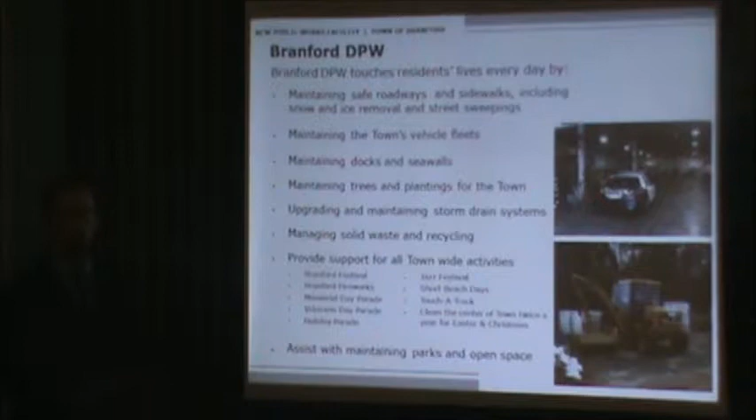One of the first things we do in this process, from our experience with my firm - we've been involved in more than 60 public works facilities in New England over the last 15 years - is identify what the department does for the community, because they play a very vital role. I thought it important to recap that for you and others in the audience today, to touch on what this facility will serve.

The DPW touches the residents' lives every day by maintaining safe roadways and sidewalks, including snow and ice removal, maintaining the town's vehicle fleets, maintaining trees and plantings for the town, managing solid waste, and providing support for town-wide activities. They also assist with parks and open space upkeep within the community.

In addition to the Department of Public Works, the Board of Education and General Government Buildings will also be supported out of this facility, and they provide a vital role to the community as well by maintaining town-owned buildings and Board of Education facilities through carpentry services, HVAC, electrical, and plumbing maintenance activities. So quite a bit goes on within this facility.

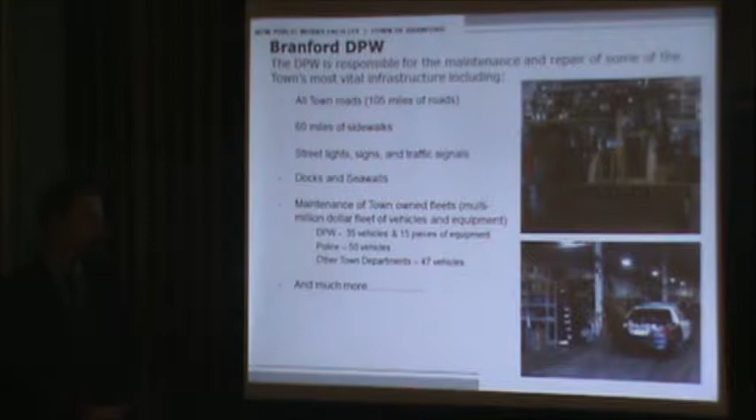The DPW is responsible for the maintenance and repair of some of the most vital infrastructure of the town, including 105 miles of roadways, 60 miles of sidewalks, street lights, signs, docks, and seawalls. They maintain all of the town's fleets, which include 50 pieces of equipment, vehicles and equipment from DPW, 50 from the police, as well as 47 other town departments, and much more that they're responsible for on a day-to-day basis.

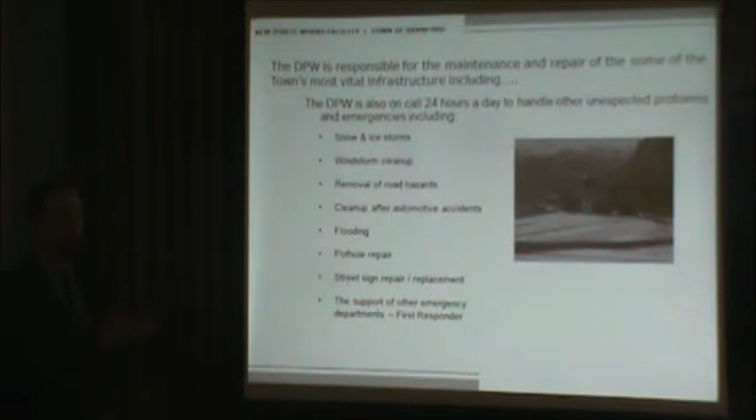It's important to note they're also on call 24 hours a day to respond to the needs of the community, for things including the obvious snow and ice storms, windstorm cleanup - which we're all very familiar with this past year with all the windstorms - dealing with flooding, and support of other emergency departments.

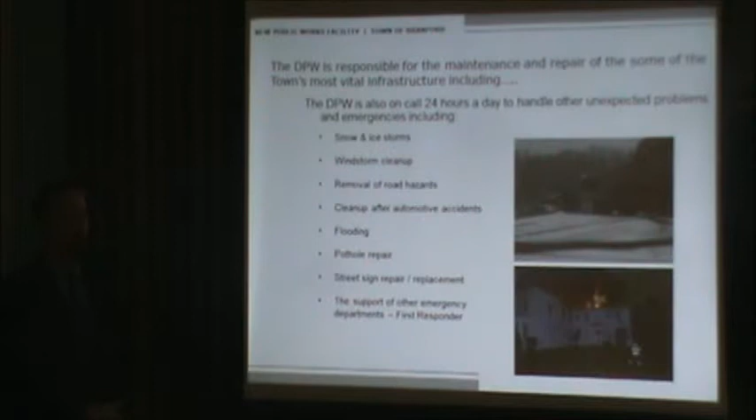A lot of people ask, well, why are we talking about a house that's on fire? Public Works will be responding to block off roadways, clean up after the mess, or clear the road so that other emergency services can get to the emergency needs of the community. So they do provide really a first responder need to the community.

I think APWA recently said it best in one of their articles, where they indicated that Public Works is really the first responders who are there until the emergency is over. So the facility really needs to be designed to support that operation, keeping in mind the first responder needs of the Department of Public Works.

So why does the town need a facility? That was the next step, and what we really wanted to do was identify what the issues are that are affecting their day-to-day operations and their ability to serve the community with the most efficient services capable.

The department's responsibilities have increased significantly over the years, along with the number of vehicles and pieces of equipment, but the facilities have not kept pace. Back in 2007, the report from Silver/Petrucelli confirmed that the existing facility, prior to demolition, was not adequate to serve their needs because of the increase in services the Department of Public Works was providing.

They're currently in temporary rented facilities. This facility was not designed with Public Works and emergency response operations in mind, and we looked at some of the issues associated with that site. It serves their current needs in the short term, but in the long term it really does not have some of the basic elements needed to provide safe and efficient services.

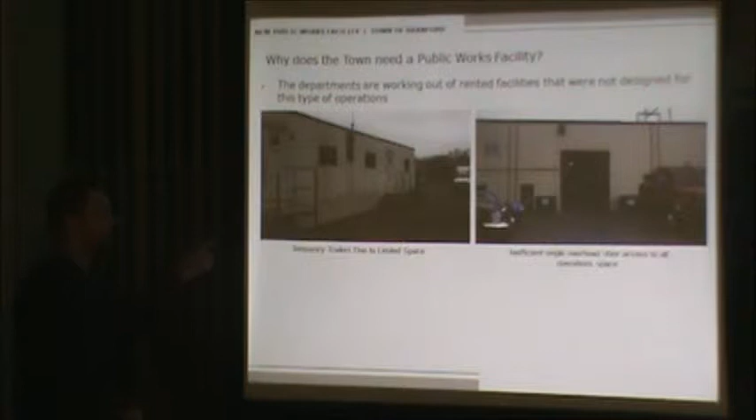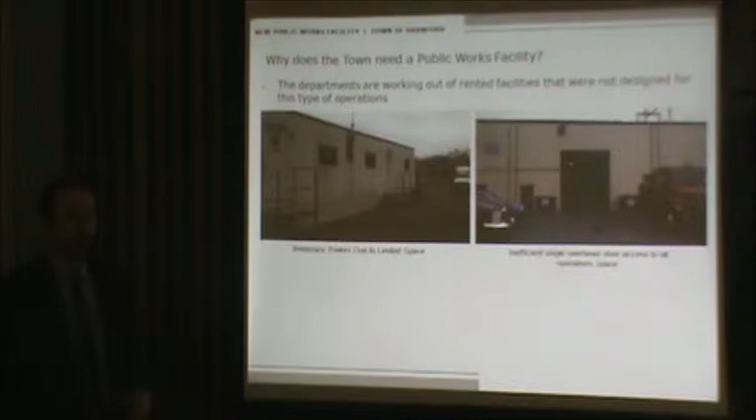The department is working out of rented facilities, including a temporary trailer, due to limited space within the existing facility. In addition, as shown in the photograph on your right, the main floor area, which serves vehicle and equipment storage, maintenance, workshops, and employee facilities, is all accessed through one overhead door. This becomes a bottleneck that impacts operations, and the facility itself is not adequately sized to service the entire fleet.

As a result, you have a lot of equipment that ends up being stored outdoors, whether it be a plow and all of their attachments. And this is some very expensive equipment. The replacement of one large DPW vehicle could be $150,000 to $180,000.

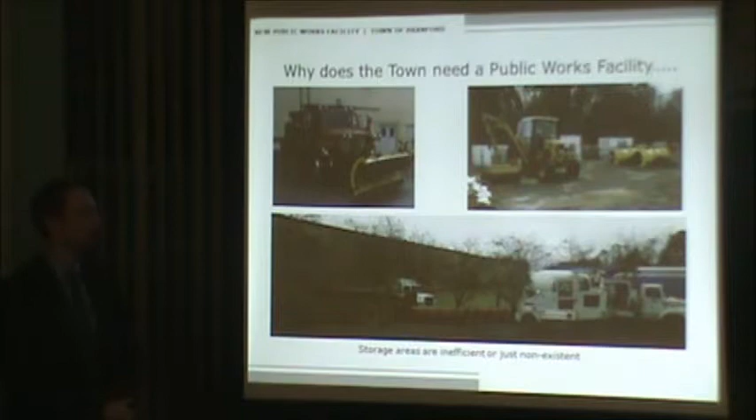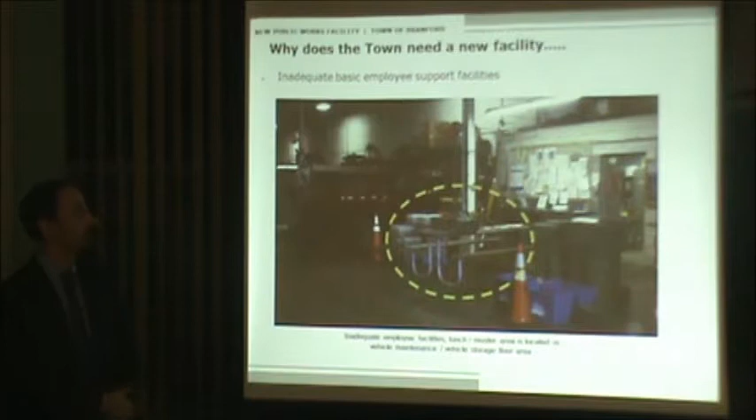One of the biggest questions we get when designing these facilities is, do we really need to put the trucks inside versus storing them outside? That's an important question we've done a lot of research into, and we've broken it down into 6 main points. I'm going to show you some examples of photographs from other communities we've documented.

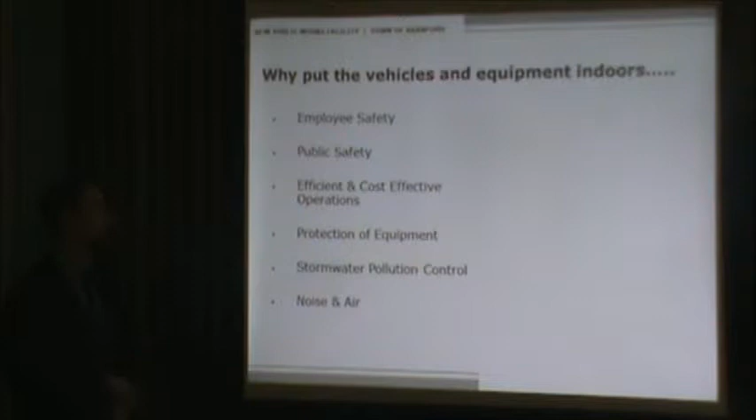The first is employee safety. If the equipment is stored outside and you have to clean it up, this is what employees have to do: stand on the running board, stand on a tire, and reach over. It's really difficult to maintain that equipment, especially if it's raining, sleeting, or snowing.

Public safety is another important issue. If a vehicle is stored outside and you can't get it started or you have to clean it, it can delay the response times of DPW, which could result in unsafe road conditions.

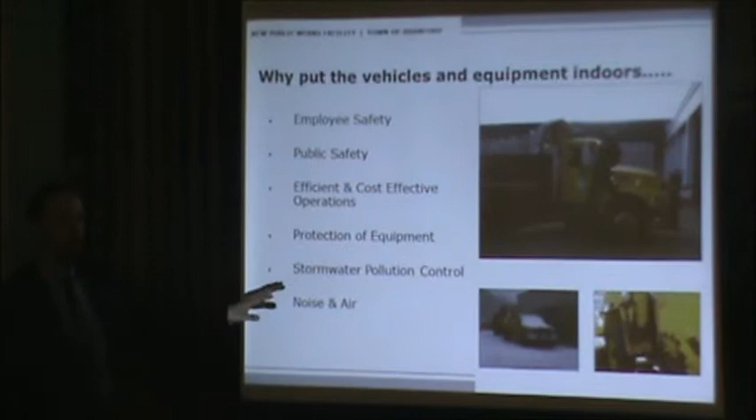Finally, stormwater pollution control, noise, and air are very important. When vehicles are stored indoors, any drips from those vehicles go into a floor drain system and ultimately to a sewer system, as opposed to going into the stormwater system when stored outdoors. Noise and air are an issue too, because when equipment is stored outdoors, it takes quite a bit of idling time to get the vehicle up to operating temperature.

I think the best way to show that is with 2 quick video clips. This is a video clip of a vehicle, standing at the back looking up towards the exhaust stack. This was stored in a minimally heated garage at 45 degrees, and when we started it up with the operator, this is what we got.

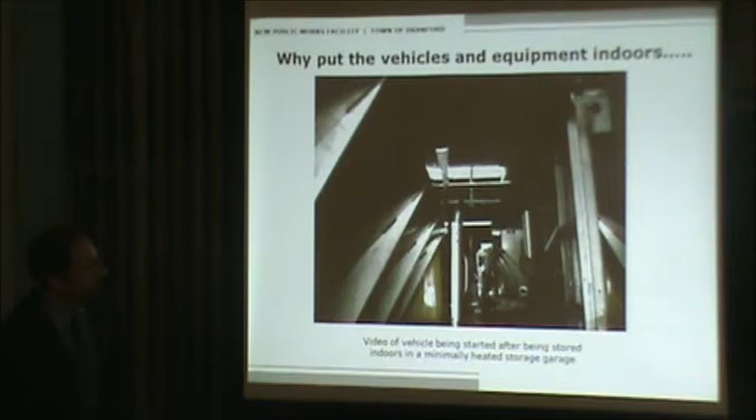You can see it started up right away. There was just a quick puff of exhaust, and the vehicle was ready to go in about 2 minutes once the air brakes came up to pressure.

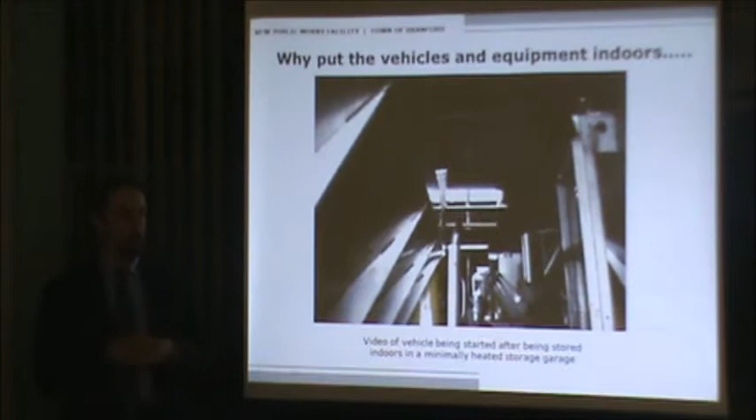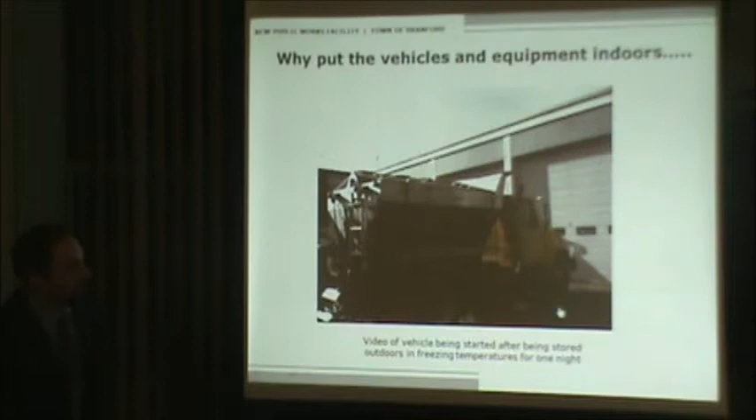We took that same vehicle, left it out overnight in 20-degree temperatures, came in the next morning, and started the vehicle. This is what we got the second time. As you can see, because the vehicle is cold, the diesel fuel gels, you get incomplete combustion, and you get quite a bit of exhaust. It actually took us half an hour to get this vehicle started.

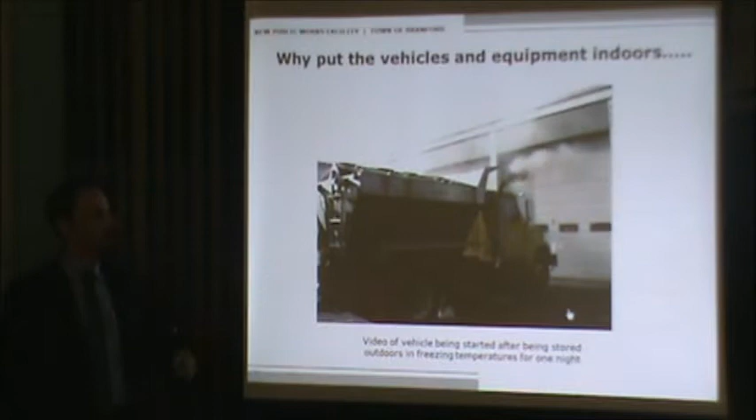So you can see, in an emergency response situation when they're trying to get out and repair the roads, or ice or salt the roads, you're going to have trouble getting some of these vehicles started, never mind the noise and exhaust associated with storing this equipment outdoors.

The next step for us was to go through and identify what is proposed to meet the current and future needs of the Public Works, Board of Education, and general government buildings. That process involved, based on our experience, meeting with the staff, because every community does it a little bit different.

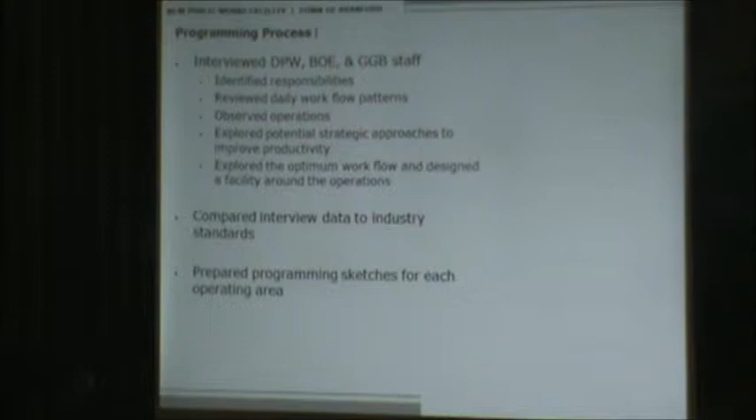So we interviewed the staff, reviewed their daily responsibilities and workflow patterns, explored potential strategic approaches to improving productivity, and compared the data we obtained to industry standards. Then we began preparing programming sketches, which were a tool for us to take what we heard, put it on paper, and review it with each individual to make sure we understood their operation.

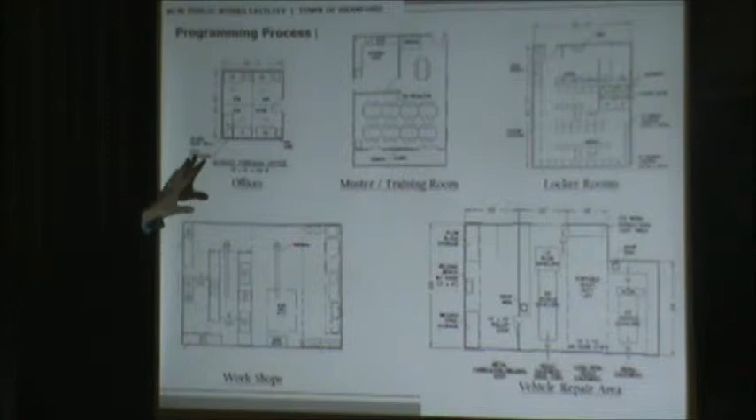This is a sample of some of those programming sketches, ranging from office to muster and training rooms, to locker rooms, up to larger workshop areas and vehicle repair areas. This was a result of those interviews, and it allowed us to sit down and further refine the program.

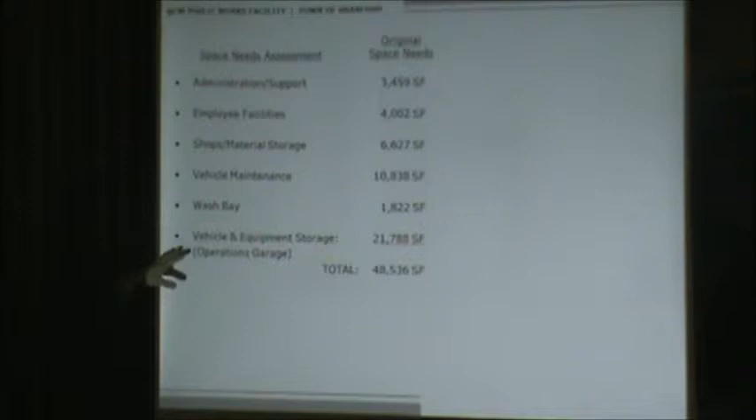When we completed our space needs assessment, we broke it into the major operating areas: administration, employee facilities, shops, maintenance, wash, and vehicle and equipment storage. We identified a need of roughly 48,500 square feet.

That seemed a little on the high side for us initially, primarily driven by the fact that we had 3 departments operating under one facility. So we reapproached our programming analysis, worked with DPW, and came up with ways to consolidate a lot of those spaces and have shared use of many of them.

As a result of that, we were able to reduce the space needs from 48,500 to roughly 35,900 square feet, which is a 26% reduction.

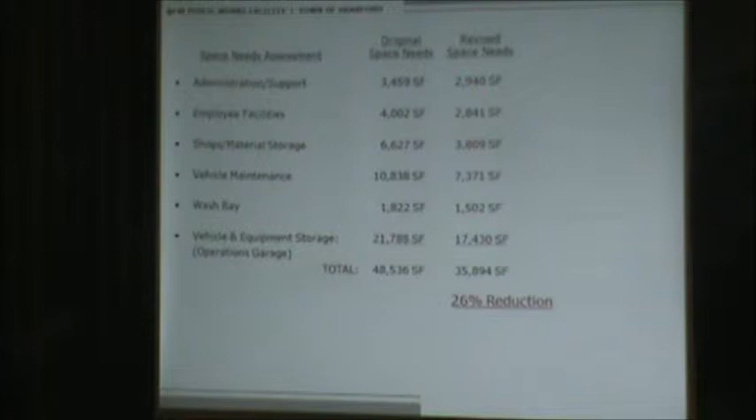The next step was to compare that to industry standards, which we developed from all 60 facilities I mentioned. This basically calculates a range of where the facility should fall, and that identified a need of roughly 35,000 to 42,000 square feet.

So as you can see, with the revised space needs assessment, we're at the lower end, but within what other communities are doing. That was good verification that the program in front of us was adequate. It's important to note that once you head below that minimum recommended space needs, you begin to have compromises in operations. Not that you can't compromise, but the way it's designed and programmed now will meet the current and future needs of both DPW, Board of Education, and GGB.

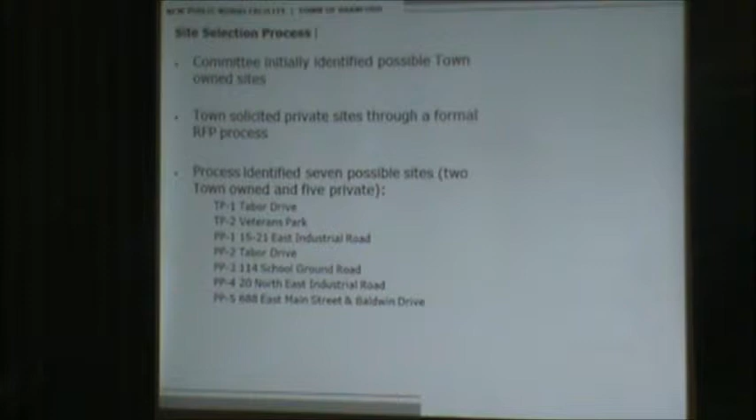Concurrently with the program analysis, we began the site selection process. As discussed earlier, we initially worked with the committee on the possible town-owned sites and also the privately owned sites that came up through the RFP process.

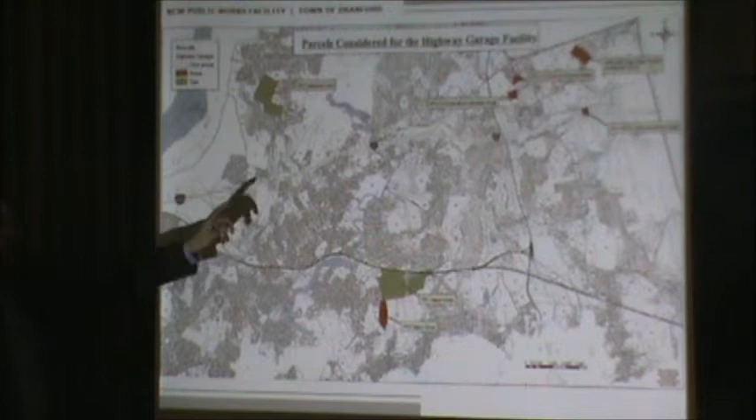This is a list of the 7 sites identified by the committee, which we took to the next step of evaluating. This plan shows a general overview of where those sites are located within the town. The privately owned sites are shown in red, in the upper right as well as the bottom, and the publicly owned sites are shown in green.

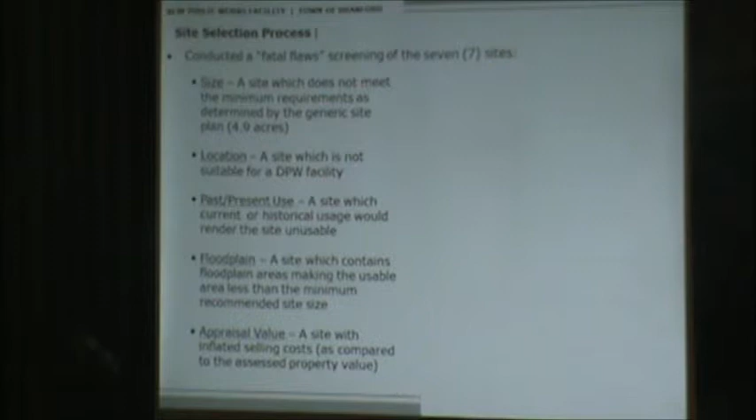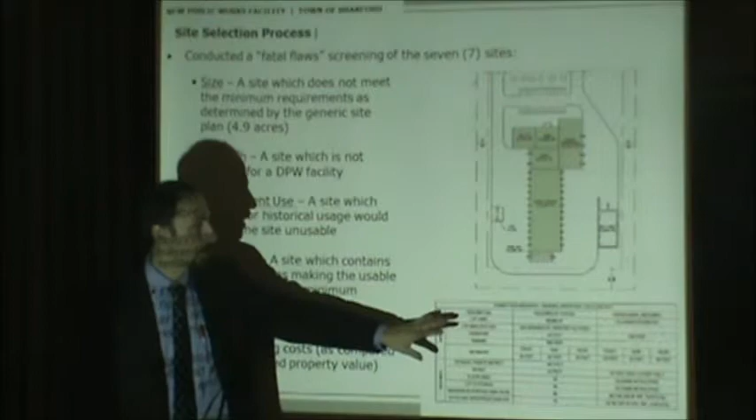The next step for us was to take those 7 sites and conduct a fatal flaws analysis, which looked at items such as the size of the site. We took the program that was prepared and made a generic site plan, which, using both the operational requirements and the zoning requirements, identified a need of roughly 4.9 acres to support the operational aspects of the facility as well as meet the zoning. That became our baseline for the site size.

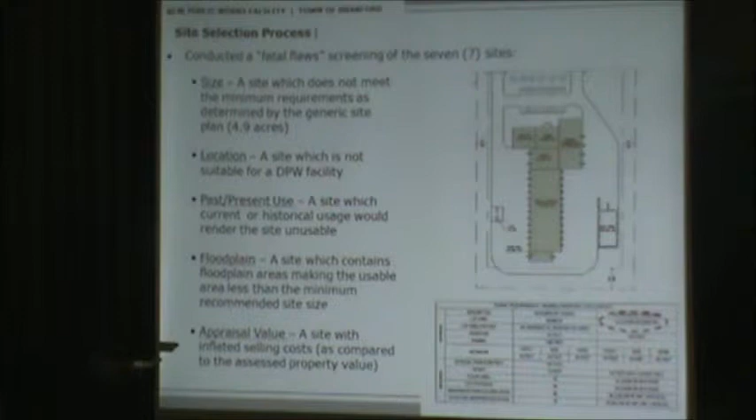We looked at the location to determine if it was suitable for a DPW facility. We looked at the past and present use, the floodplain, which can restrict development of these sites, as well as the appraised value, just to check on the privately owned sites to see if the price being offered was reasonable.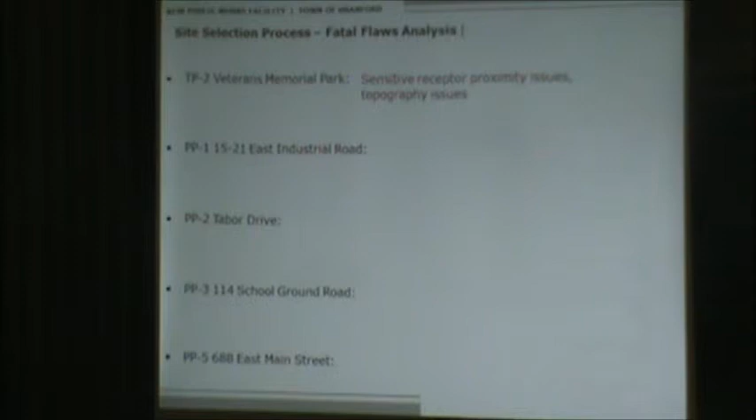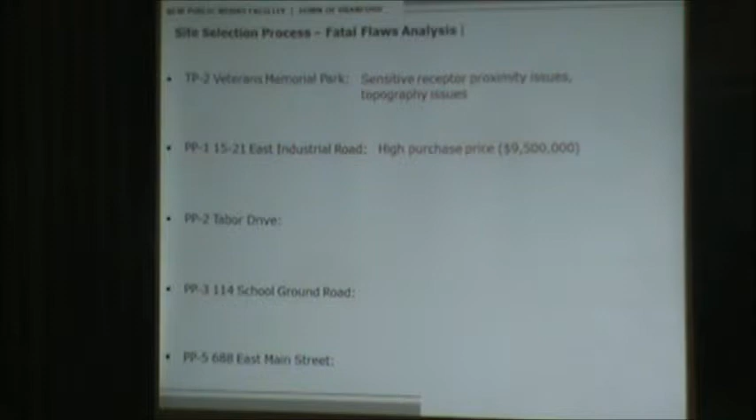Through that process, we eliminated 5 of the sites, first being the Veterans Memorial Park, primarily due to sensitive receptor proximity issues with the abutters, as well as some topography issues in the back of the site. East Industrial Road was eliminated primarily due to the high price at $9.5 million, on top of which substantial renovations would be required to retrofit it for public works operations. The privately owned Tabor Drive site was eliminated primarily because the usable area became too small after we accounted for the landfill area and the floodplain areas that existed on that site.

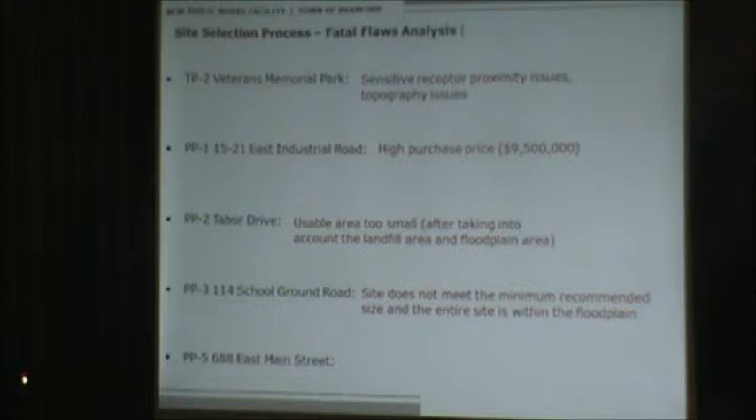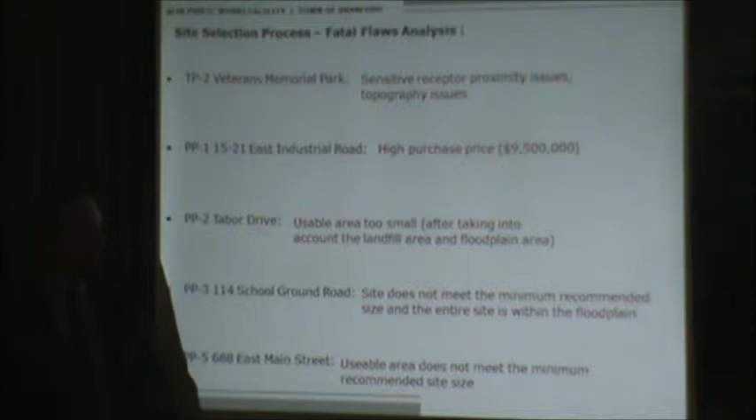The School Ground Road site did not meet the minimum recommended size of 4.9 acres, and the entire site was within the floodplain. And finally, the East Main Street site - the usable area there does not meet the minimum recommended site size, taking into consideration the drainage systems that exist on the site. So those 5 were ultimately removed from further consideration.

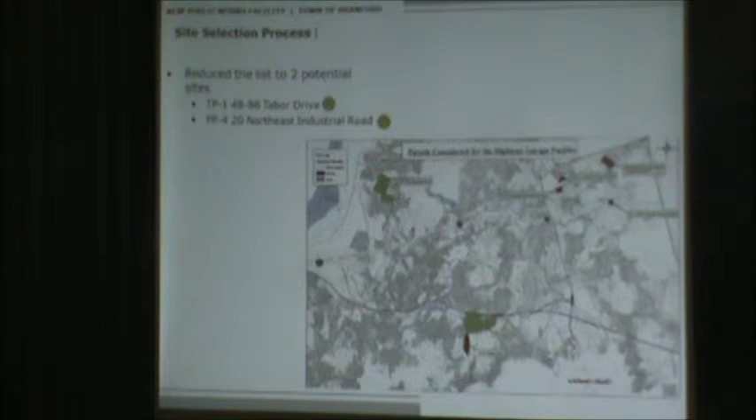So the next step was to take the remaining 2 sites, the Tabor Drive site, the town-owned Tabor Drive site, and the Northeast Industrial Road site, and begin the evaluation in a more detailed manner. This involved looking closely at some of the development opportunities that existed. We developed a 12-point evaluation criteria, ranging from property ownership, to physical site features, to operational impacts, down to zoning consistency.

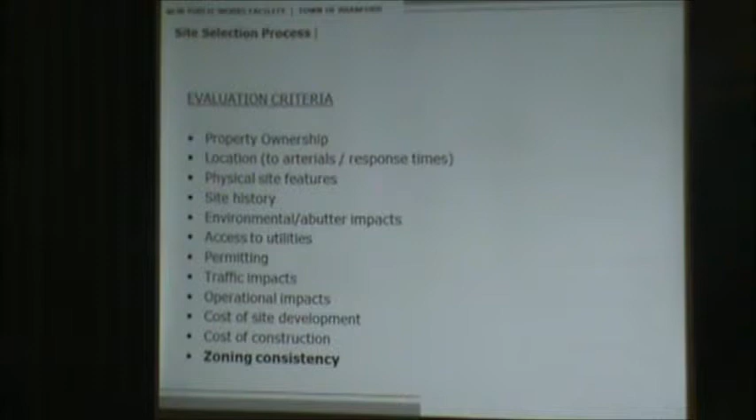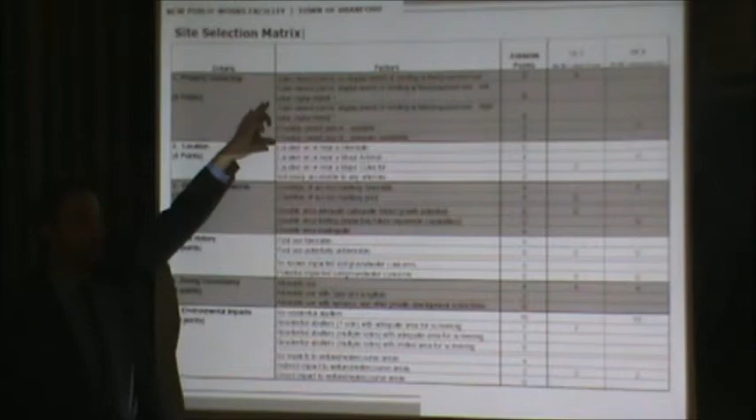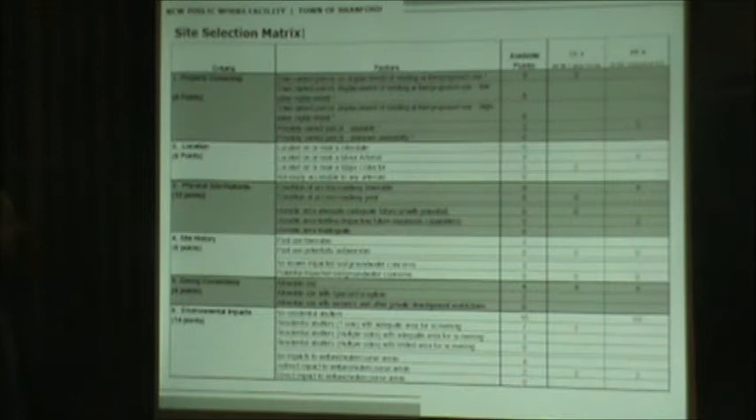These were put into a site selection matrix, and this is a copy of the matrix that's included in your report. For each item, we had an evaluation factor, and then a weighted value associated with that factor. Using all the data gathered, we assigned numbers to each of the items - this is the first 6 criteria, and this is the second 6 criteria. Subsequent to completing this, we subtotaled it.

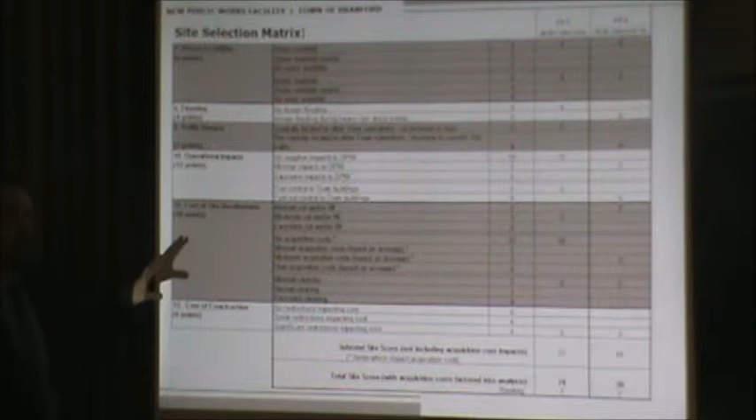Through that process, the Tabor Drive site scored higher than the Northeast Industrial Road site, 74 versus 50. This is intended to indicate which site would serve the DPW, Board of Education, and general government buildings in the most efficient, cost-effective manner.

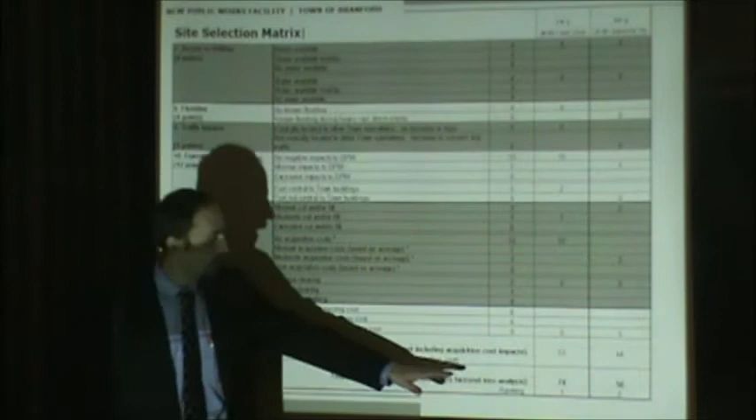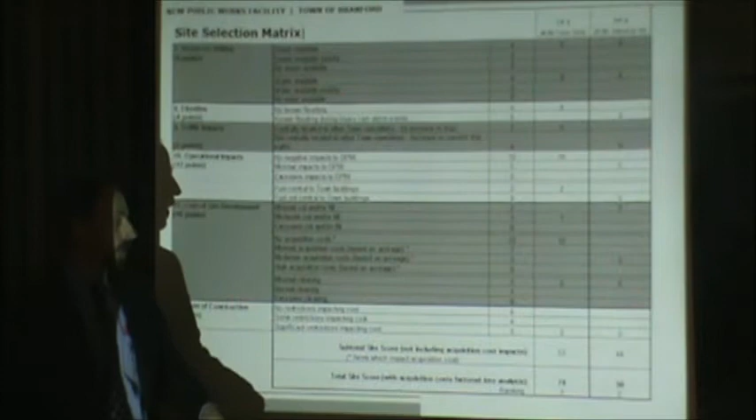One of the items we typically do is back out these scores and look just operationally. So we took out all acquisition cost related criteria and wanted to see how the sites compared just from an operational perspective - can it support the facility, can it support future expansion, does it support circulation. Through that, the Tabor Drive site is at 53, Northeast Industrial Road at 44. So you can see the gap between the 2 sites began to close when you took out the acquisition cost. But in either case, the Tabor Drive site indicated through this process that it was the most preferable site to support the operations.

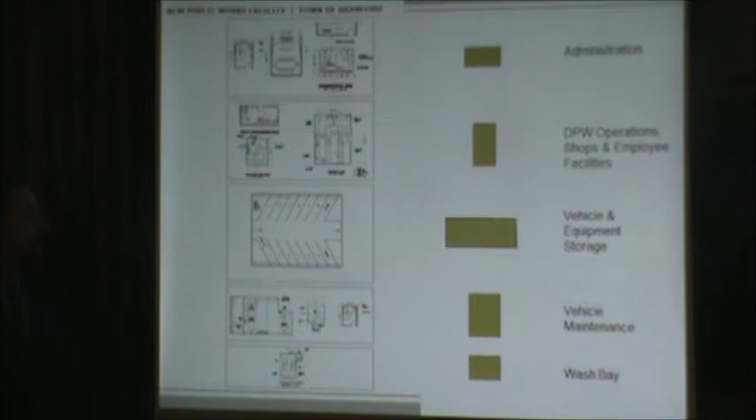Through that process, we then went to developing conceptual building and site alternatives for the concepts. We took each of those room data sketches and pieced them together into our major operating areas. We used these building blocks to then assess the potential alternatives on the site.

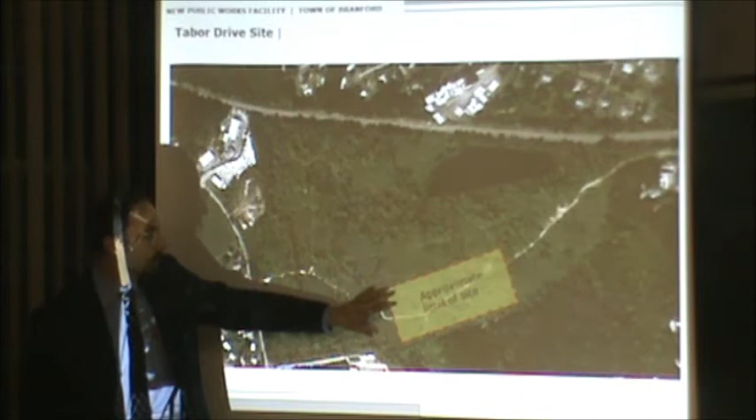This is an aerial view of the Tabor site, and based on a total of 77 acres, we were looking to locate the Department of Public Works facility to the southern portion of the site near the property line, so that the other portions of the site could be usable for other town uses, whether it be fields, passive recreation, or whatever may be the case.

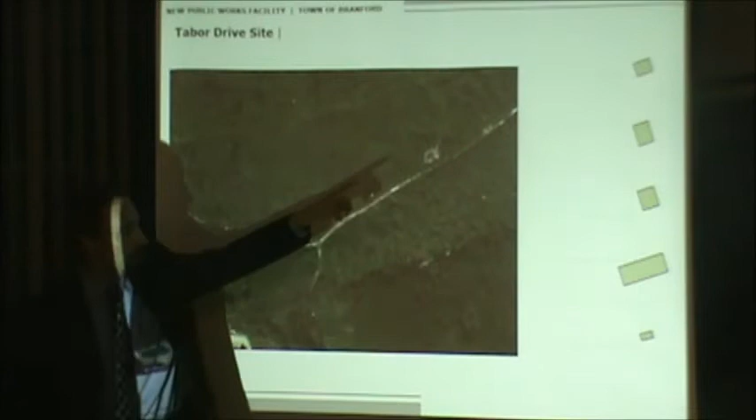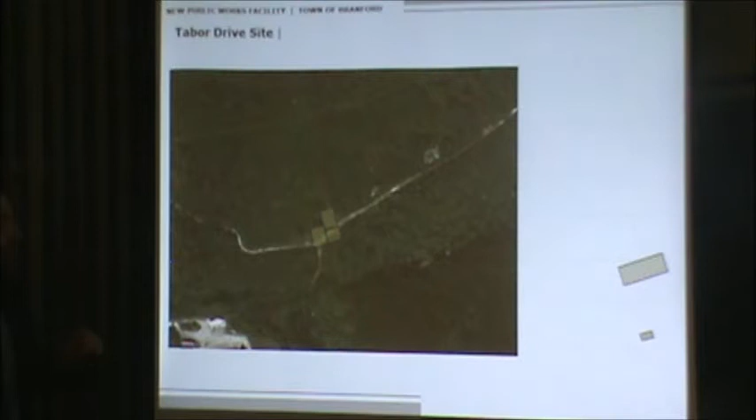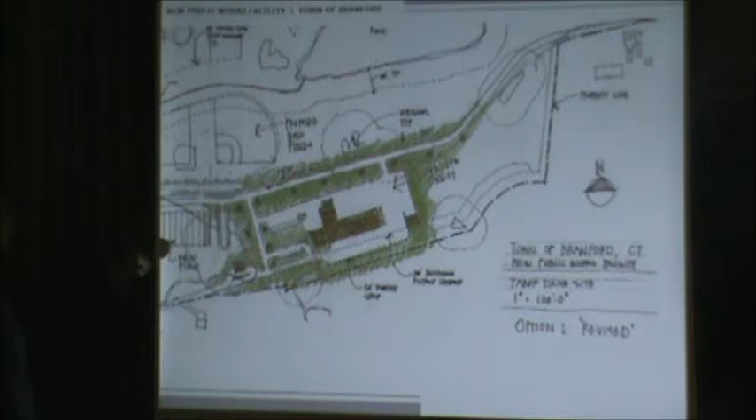So using this general area for the Department of Public Works facility, we created a site plan and began piecing together each of those building blocks I mentioned - the administration, workshops, and maintenance. We pieced them together on the site through a series of alternatives, looking at several different configurations, and ended up with a configuration that had more of a linear fashion. The purpose was so that we could consolidate that site into a linear fashion and reduce expansion to the rest of the site, making more of the site available for things such as ball fields or other passive recreation uses.

What I want to do is briefly touch on the components of the building itself, and show you some photographs of other recently completed facilities so you understand what's going to go into each component. The first being the vehicle and equipment storage that we talked about earlier.

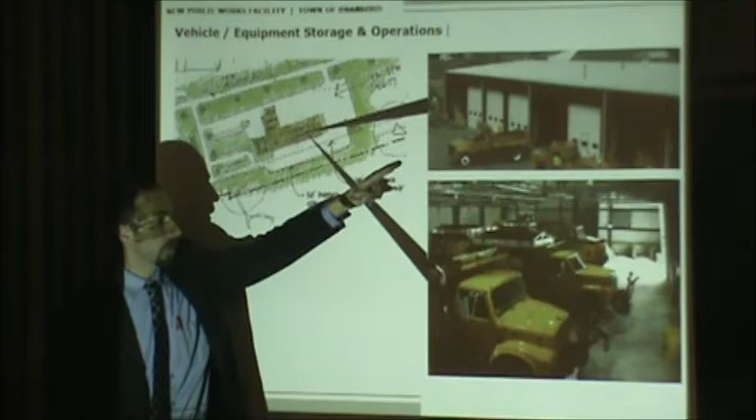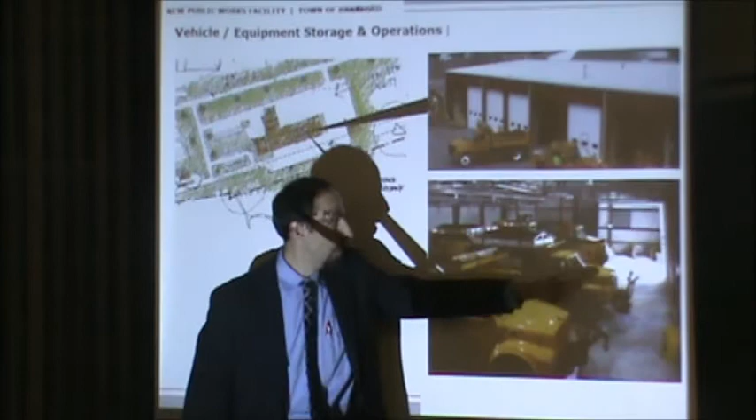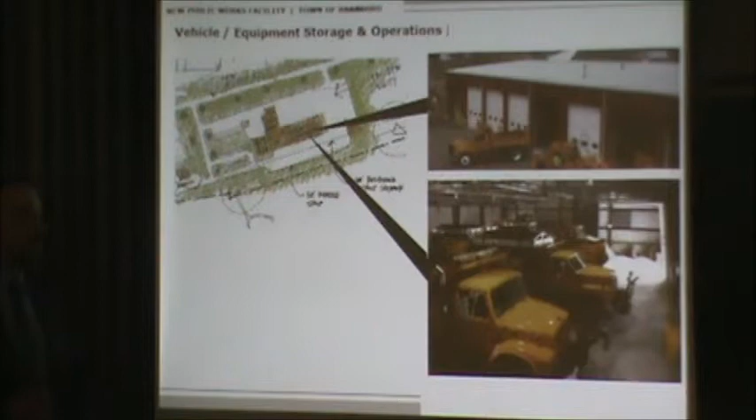In this case, we're talking about a very basic industrial utilitarian type building to support that operation, with multiple overhead doors so vehicles can access the bays. Inside, your equipment would be stored in minimally heated, probably 45 to 50 degree temperatures, with the ability to store smaller equipment as well as the plows within that space. So this achieves the goal of putting it inside. It's very inexpensive space to construct, and it's storing a very valuable fleet and extending the life of that fleet.

Second area would be the workshops. These are typically accessed through smaller overhead doors where you can get just smaller 1-ton type equipment inside. Other support functions would include material storage through some heavy-duty shelving, as well as some workshop space, carpentry space to support that operation.

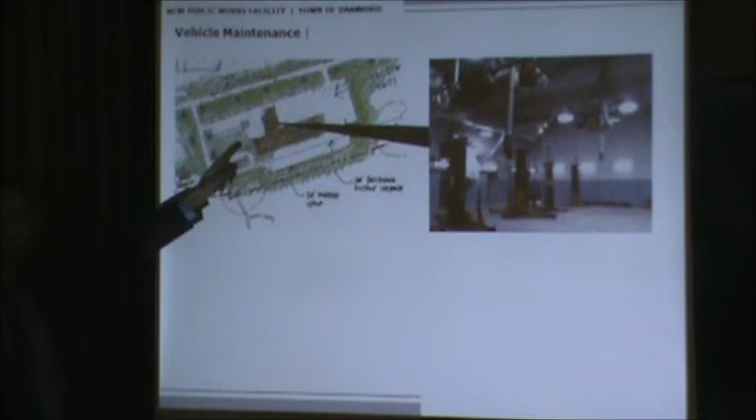The next area is the vehicle maintenance facility. This is obviously a very important operation because they are maintaining 147 pieces of equipment within the community.

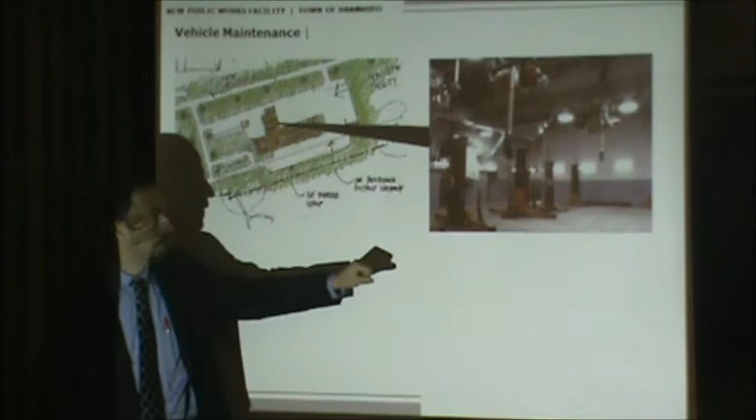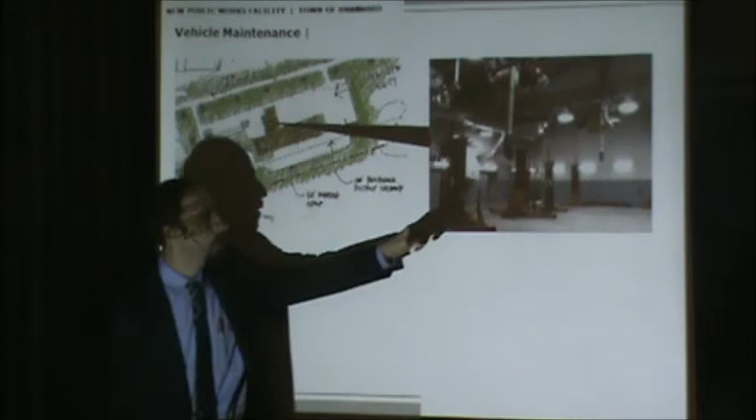This has some of your basic support functions found in a public works facility today: lifting capabilities to get the equipment up off the ground to maintain it, as well as overhead tailpipe exhaust that improves the overall indoor air quality, and lubrication distribution systems that help maintain a clean and safe work environment by keeping all the fluids in a closed system.

It's also supported with parts storage, again heavy-duty shelving, and a separate fluid storage room, where those fluids would be stored in a separate fire-rated room with its own spill prevention so that it never reaches the environment.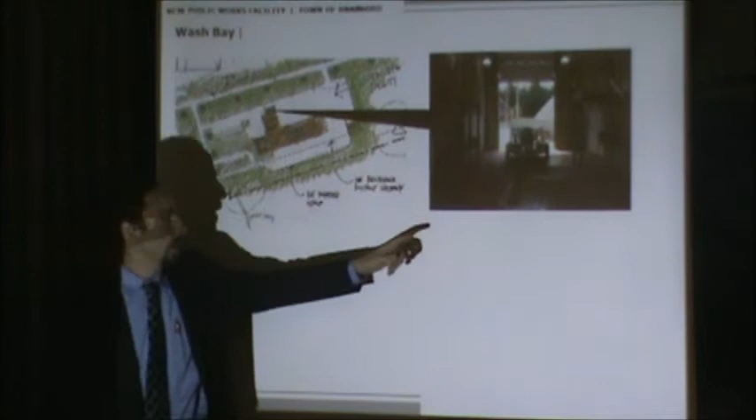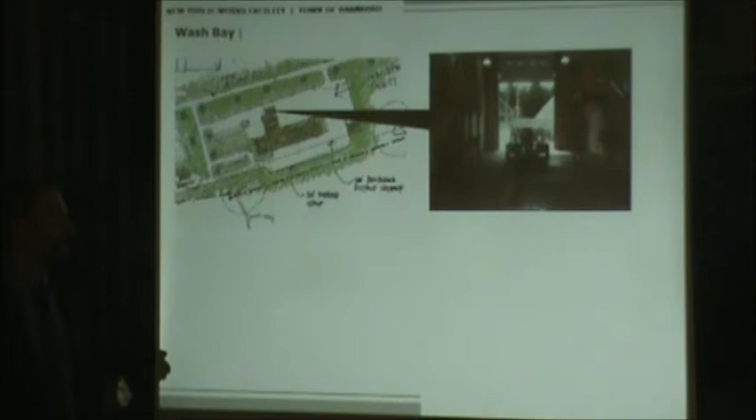On either side you can have catwalks so you can get up high and wash the insides of these vehicles out. This is important because it will help maintain that equipment, since it is storing those corrosive chemicals from salting operations.

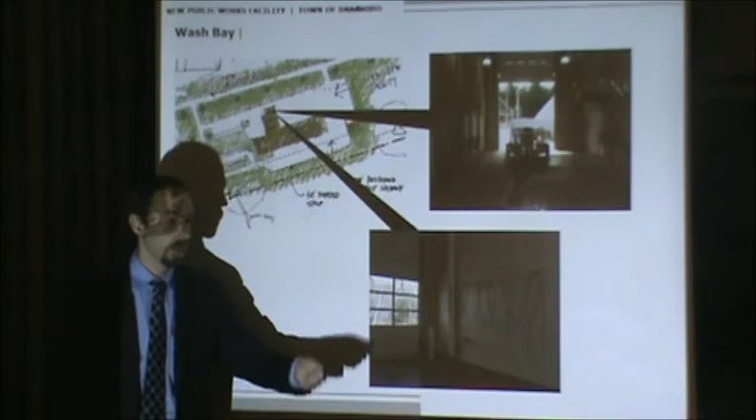Washing activities are done with a basic pressure washing system, where you have your hose suspended from a cable and a simple wand to wash down that equipment. We're also proposing a water reclamation system to reduce the water consumption that takes place within that building.

The final area is the administration and employee facilities. This would have your basic employee support functions that wouldn't be located in the garage. We'd have a separate room with a mustering area and lunch area.

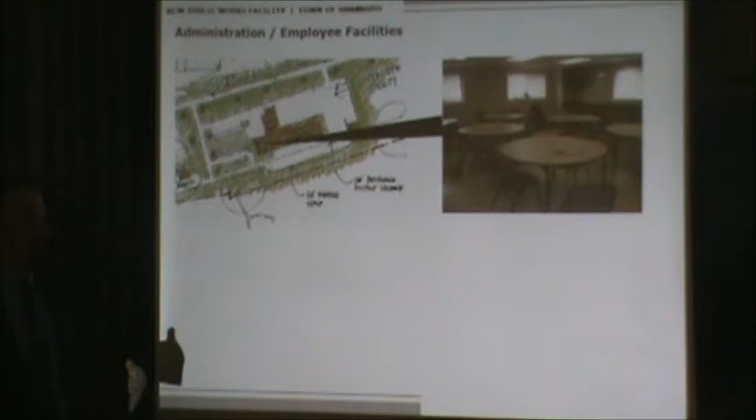To reduce space, we'd also design this to be the training area so they can keep up with their state mandated training. We'd have basic locker, shower, and toilet facilities, as well as basic office functions.

There are a couple of support functions on site that are critical to the operation, including the salt structure. Shown here is a high arch gambrel structure, which is a great structure for the operation.

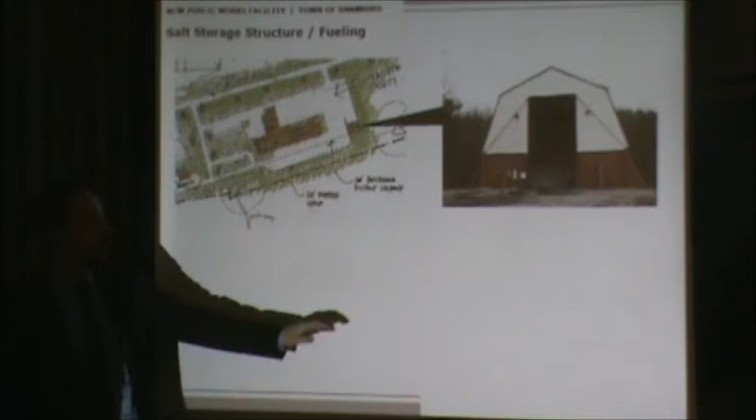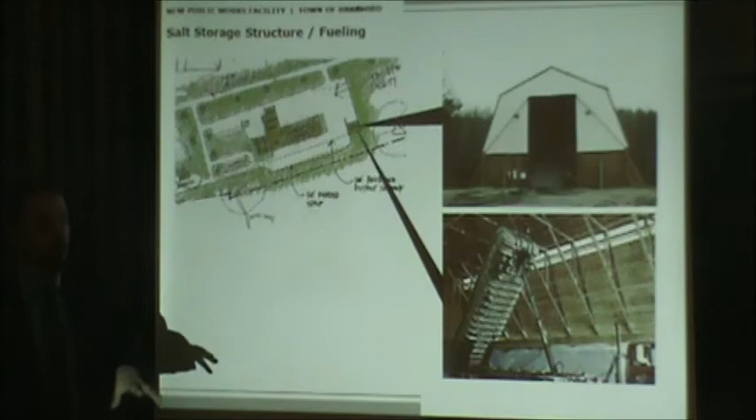It's a very high door, and the reason for that is they can actually have deliveries made right inside the structure. That helps because with lower doors, you have to dump outside, and then DPW has to manage it twice, moving it inside. This helps reduce non-productive labor by allowing it to be dumped inside.

We're also proposing a fueling facility with basic pumps and a canopy for that operation.

Taking all that into consideration, the next step for us was to put together some project costs. We looked at using average bid prices from similar projects we've seen over the last three or four years.

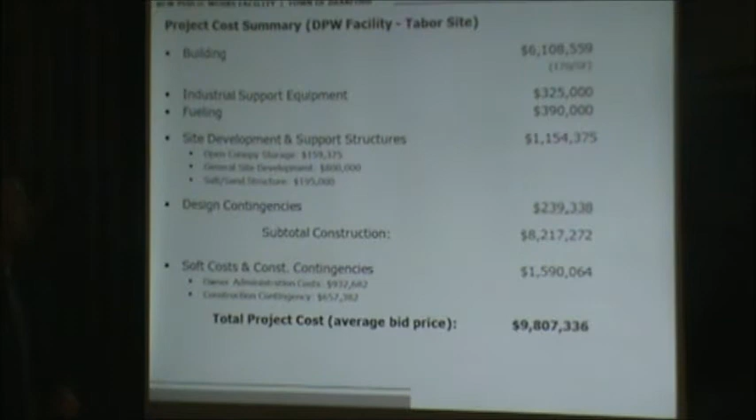It's important to note we're using average bid prices because we don't want to be the low bidder in many instances, so we're trying to give you a safe number for what it would cost for one of these facilities. Taking into consideration just the DPW facility as it exists on the site shown earlier, the building costs roughly $6.1 million, which is approximately $170 a square foot.

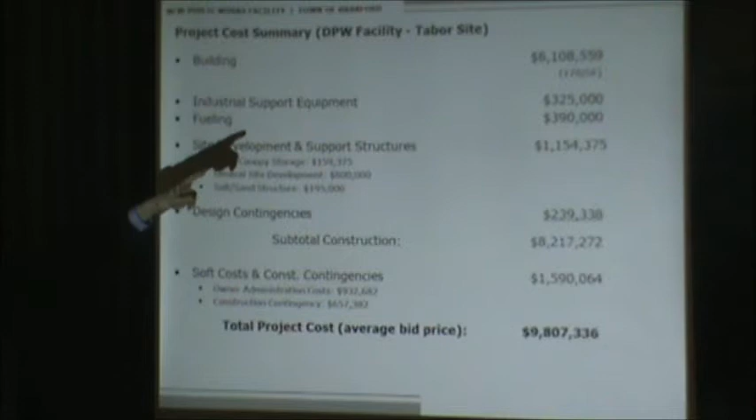We broke out some of the other components that are not typical for many other buildings, such as the industrial support equipment and the fueling, at $325,000 and $390,000, as well as the site development and support structures. In this case, site development includes paving for heavy equipment and stormwater management systems.

We have open canopy storage to get the sander bodies out of the weather, as well as the salt and sand storage structure. We're carrying about $1 million in contingency for this estimate as a whole, because of the early nature of the project.

So we have design contingencies to account for items we haven't really been able to flesh out through the design process, as well as construction contingencies.

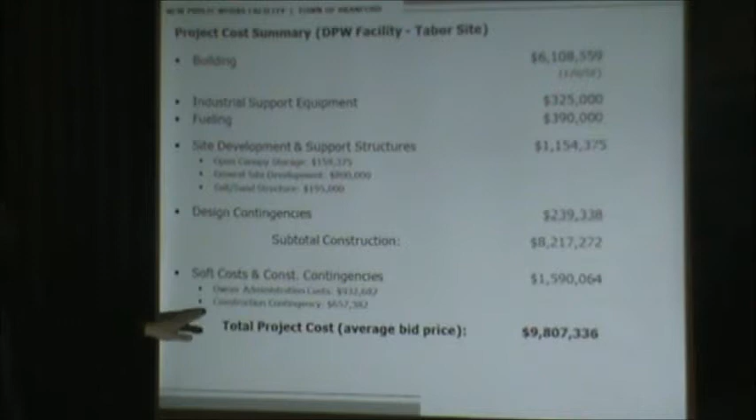When you factor in the other owner soft costs, such as architectural and engineering fees, printing of bid documents, advertising of the project, and furnishing, the total project cost for the Public Works facility and associated site components is $9.8 million.

Associated with the Tabor Drive site is what we're referring to as the off-site and shared site improvements, which is to bring roadways into the site to support the operation of Public Works, but also to serve as the infrastructure to support future development of that site.

And that includes a west site access road and an east site access road. This east side access road would be an emergency access out to Pine Orchard, as well as some off-site improvements. Tabor currently has an area that floods, so we're proposing to repair that as part of this project. And also some east off-site improvements, which would be where the emergency access road would connect to Pine Orchard, just leveling off where the road comes up to the main intersection.

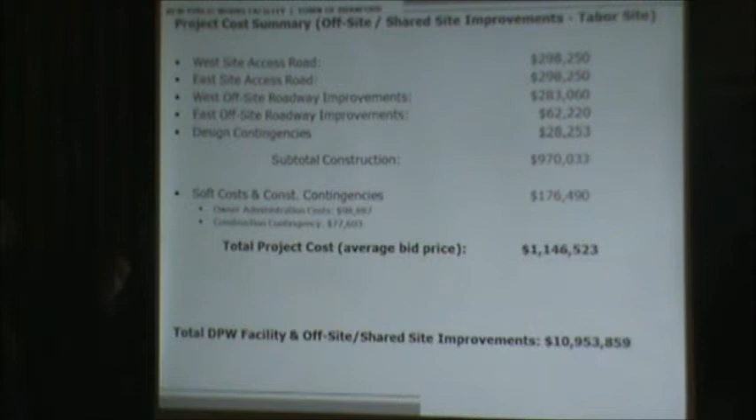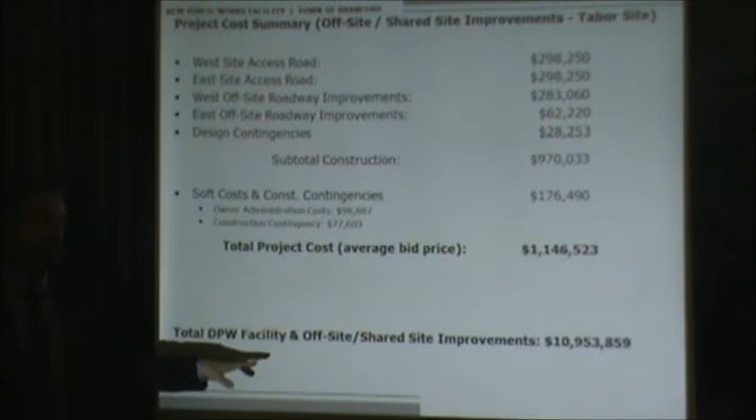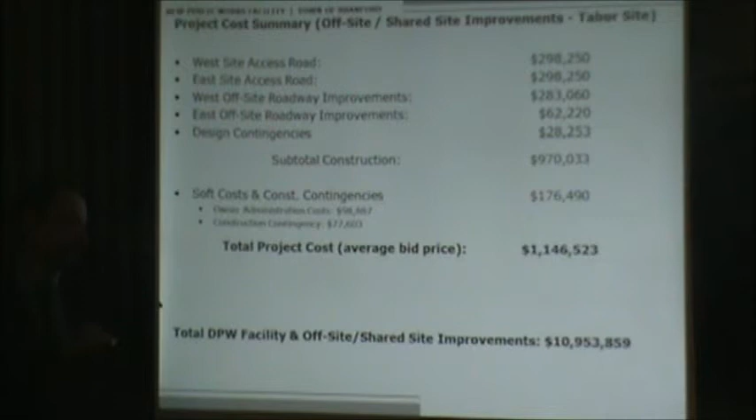So with that and the design contingencies, it's approximately $1 million more of off-site and shared improvements, for a total of 1.1 on the off-site and shared, a total of 10.9 for the two combined. Again, these are average bid prices, and over the last 3 years we've seen the low bids coming in anywhere from 8 to 10% below the engineer's estimates, primarily because we're in a really good bidding climate. We haven't seen a change to that yet. There's expectations that it will change, but at this point we're seeing that it's been pretty flat and steady.

A couple of points that we'd like to make as we go through this, as to why you shouldn't wait and why you should move forward with a project of this type: the DPW staff, if they don't move, will continue to work out of some substandard conditions. We talked about the center door, only one door into that space. The building now has no floor drains, so when you bring the trucks in after a snowstorm, you get 30 gallons melting off of each truck, so it's quite a bit of work to maintain that space. So employee safety becomes an issue because you're dealing with wet, slippery environments that aren't draining properly.

It affects the ability to provide efficient services to the community because of some of the substandard conditions, but more importantly, you lose out on the chance to fund this project when the borrowing costs and the construction costs really are at their historic lows.

There's a lot of benefits realized by a project of this type, and I think it's important to close with some of those, and these are just a few that we've identified. First and foremost, you'll protect this multi-million-dollar investment you have in this equipment. We've seen that vehicle life expectancy can go up anywhere from 3 to 6 years by putting the equipment indoors.

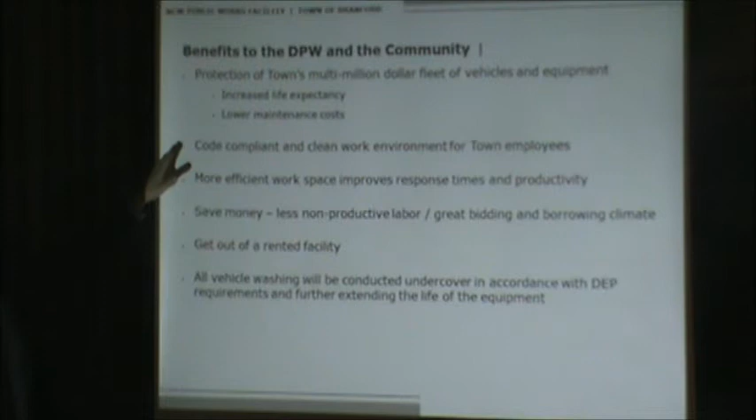You'll have lower maintenance costs on that equipment when it is stored indoors. The mechanics end up doing repairs that were unanticipated due to freezing conditions, broken hydraulic lines, and then they can't get to the preventive maintenance. So you really will lower your maintenance costs and extend the life of your equipment.

You'll have code compliant and clean work environments for your employees. Much more efficient space should improve the productivity of the staff, which will result in savings and really better service. I think the DPW does a great job with what they have, and I think this just gives them the opportunity to provide even better services.

It'll get them out of the rented facilities where you have really no return on your investment, and all that washing that's done on the vehicles will be done undercover in accordance with DEP requirements, and again, that washing will extend the life of that multi-million-dollar fleet as well.

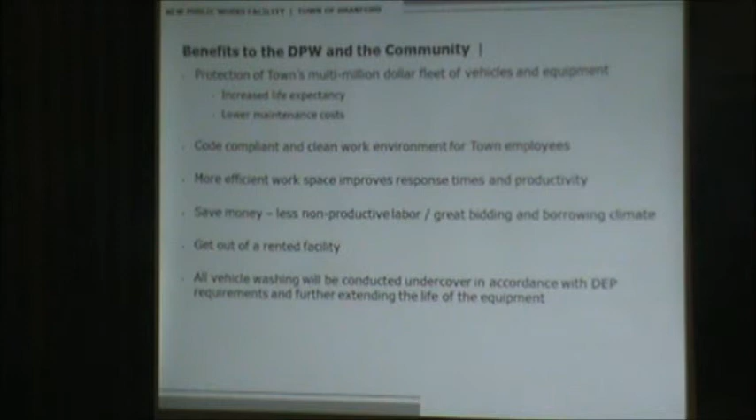So at this point, I'm going to turn it back over to Kurt to finish up.

Okay, thank you, Jeff. Before we move on to the recommendation, I just want to take an opportunity to publicly thank the committee, who are many community members here tonight, along with the Public Works employees who were valuable in the information that they gave in this process to help Jeff come up with this program.

The committee respectfully recommends that the Board of Selectmen adopt the recommendation to proceed with a plan to design and build a public works facility at the town-owned Tabor site, and to direct the Public Works Director, with this committee's assistance, to proceed to the Board of Finance and RTM for their approval in moving this project forward.

We've come to the end of our charge. You have before you the completed report, and we look forward to coming back and addressing any concerns and questions that you, as well as the public, may have. Also, there's a copy of the finalized report that will be on record at the town clerk's office for anyone else to review. And again, we welcome the input, and we appreciate the opportunity to submit this report this evening.